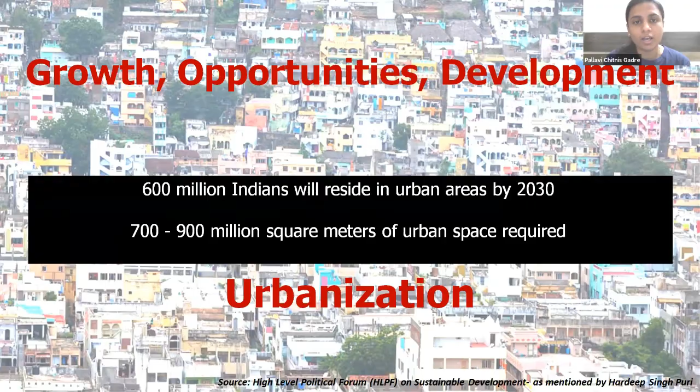It provides anyone a lot of growth, opportunity, development, and with all these comes urbanization. So people migrate from smaller areas to cities, which overall increases the population in the cities. A recent forum on sustainable development indicated that around 600 million Indians will reside in urban areas by 2030, which means 700 to 900 million square meters of urban space would be required to accommodate so many people in the city. So, with all this opportunity and urbanization, there would be a lot of challenges.

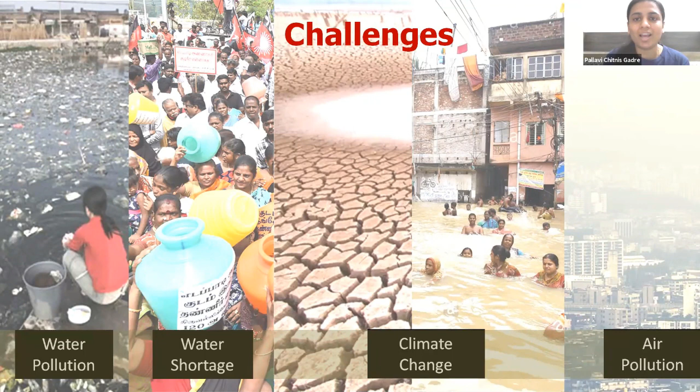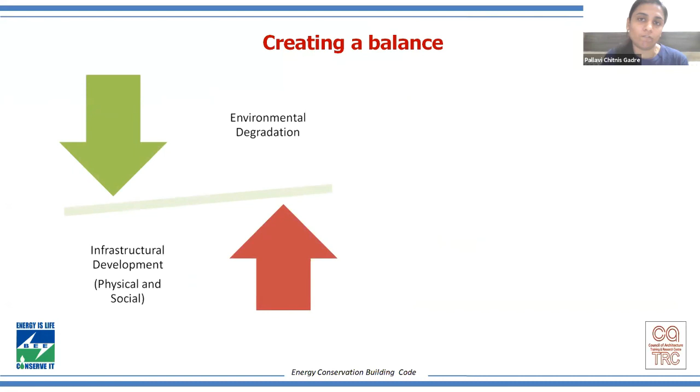And I suppose to an extent, we have started facing these environmental challenges, be it water pollution, climate change or air pollution. And this is something which we need to cater to. It is very, very important to create a balance between the two, because on one hand, the infrastructural development is going to increase, which is going to ultimately degrade the environment. So sustainable development can help in creating a balance between infrastructural development and environmental degradation.

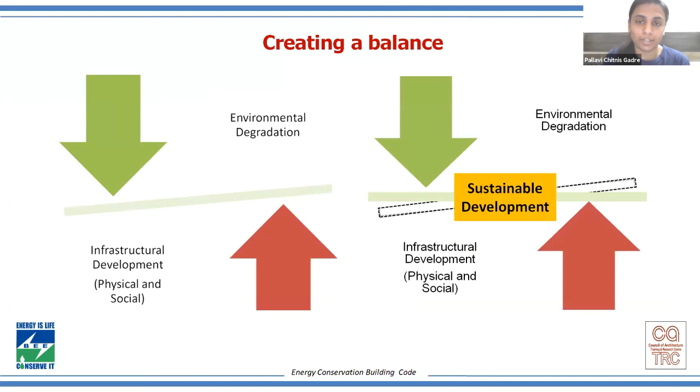A lot of national and international forums have already started working on it since the last 10 years. To name one, the Sustainable Development Goals are the latest goals defined by the United Nations, and they cover a lot of aspects of sustainable development. Energy efficiency or energy conservation is one of the important aspects indicated in the SDG goals.

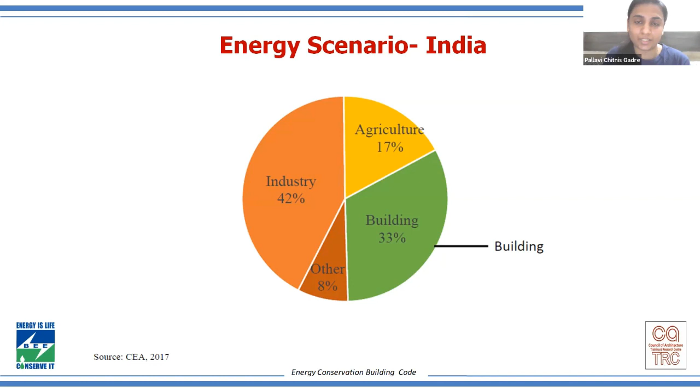Now, if we look at the energy scenario of our country, the building or construction sector comes at number two as far as energy consumers are concerned. Around 33% of the energy is consumed by the building and construction sector. This has been indicated by CEA India.

If we look at the construction scenario of our country, I think we are at a very, very beautiful place right now. Lot of development is going to happen. Lot of new buildings are going to get constructed, which will give us the opportunity of developing something sustainable, something which is energy efficient at the initial stage, and to inculcate these concepts at design stage. Existing buildings give us a lot of retrofitting opportunity, with potential of saving around 30 to 50% of energy or water per se.

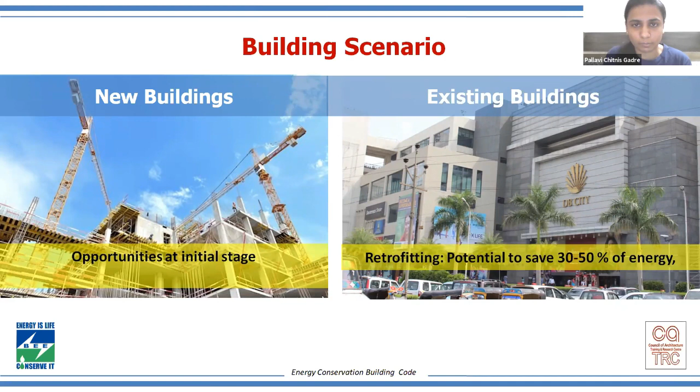If we study the building footprint of our country, currently around 659 million square meters of construction has already happened, and USAID indicated that by 2030, around 1900 million square meters of building footprint is going to get constructed, which highlights that around 66% of the building is yet to get constructed. So this gives us an immense opportunity to look at energy conservation in such a way that the right design of building can help us in reducing the overall energy consumption of the buildings.

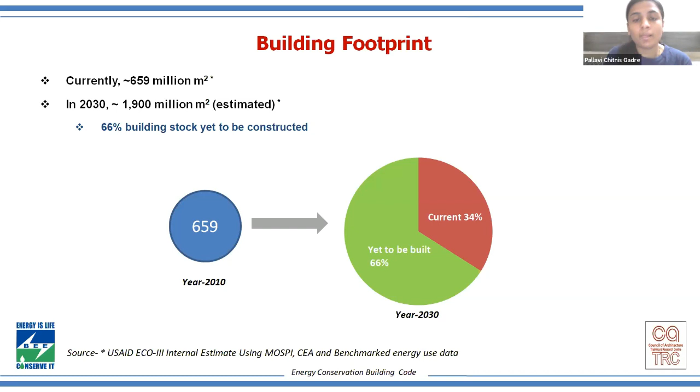So with this as a background, the Energy Conservation Act was initiated in 2001. And let me take you quickly to the Energy Conservation Act, which was enacted in 2001.

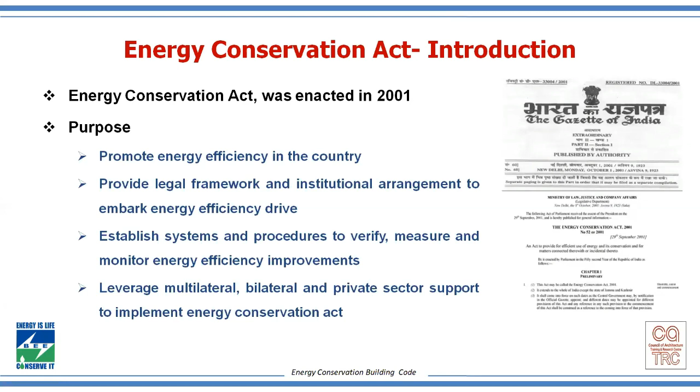This particular act was enacted in 2001, and the main purpose was to promote energy efficiency in the country. This act provided a legal framework and institutional arrangement to embark on the energy efficiency drive of the country, with lots of bifurcations indicated in the act. Let me take you quickly through the aspects that the Energy Conservation Act talked about.

The major aspects of this initiative were evolving minimum energy consumption and performance standards for notified equipment and appliances, prohibiting or identifying manufacture, sale and purchase of equipment that consumes a lot of energy, and introducing a mandatory labeling scheme for notified equipment and appliances to enable consumers to make right choices. Basically, creating awareness was also one aspect of the standard and labeling program.

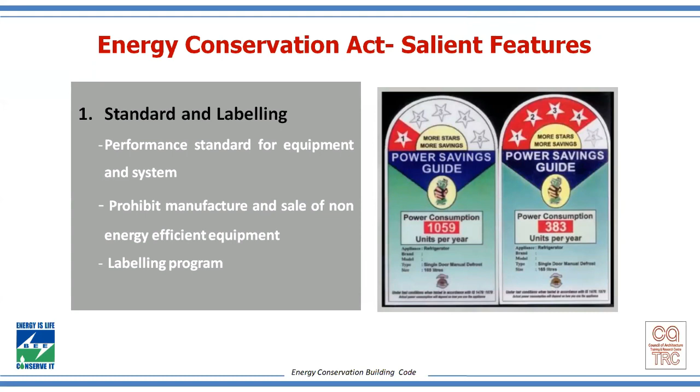Inculcating information on the benefits of energy conservation and energy efficiency to the consumer was an important part of the program. The second important aspect covered in the Energy Conservation Act was regarding certification of energy managers and accreditation of energy auditing firms.

This particular feature led BEE to establish an entire scheme of auditing and certifying energy guzzlers. For this, they introduced various exams, and identified BEE certified energy managers and auditors, who were experts in policy analysis, project management, financing, and implementation of energy efficiency projects through certification and accreditation programs.

I hope all of you are aware of designations where people mark themselves as BEE certified energy auditors or BEE certified energy managers. These are the experts identified by BEE, and this entire scheme was created because of the Energy Conservation Act.

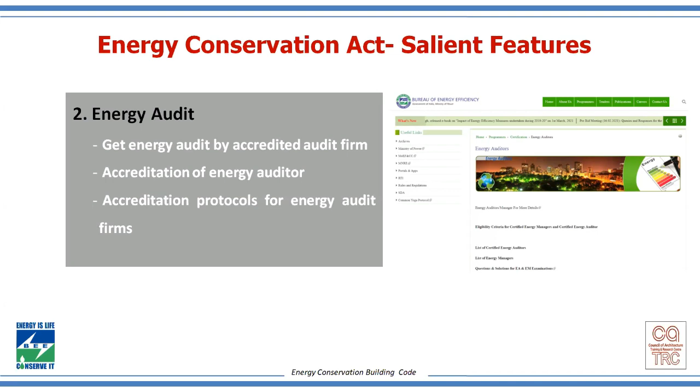The third important aspect highlighted in the Energy Conservation Act was defining the Energy Conservation Building Code and norms, which would help stakeholders from the building industry reduce energy consumption of the building. The code basically highlights various strategies and aspects that can overall help in reducing energy consumption at the design and construction phase of the building.

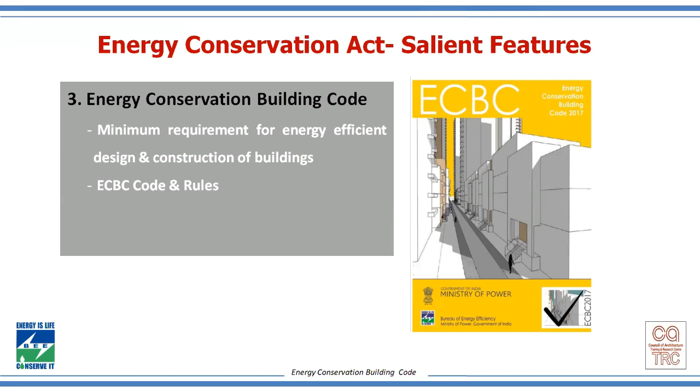There is also a provision for monitoring the building, because if you can't measure it right, you can't really monitor it. So a monitoring mechanism has also been indicated in the code. Over the next 5 days we are going to focus on this particular aspect of the Energy Conservation Act, so you're going to get a lot of information on it.

The fourth important criterion indicated by the Energy Conservation Act is establishing an Energy Conservation Fund. This fund is set up at a central level, to promote energy service companies, and to increase or support research and development related activities, which ultimately would help reduce the energy consumption pattern.

Last but not the least, capacity building. It is very important to make people aware of the strategies they can adopt. These three aspects are very important as part of the Energy Conservation Fund.

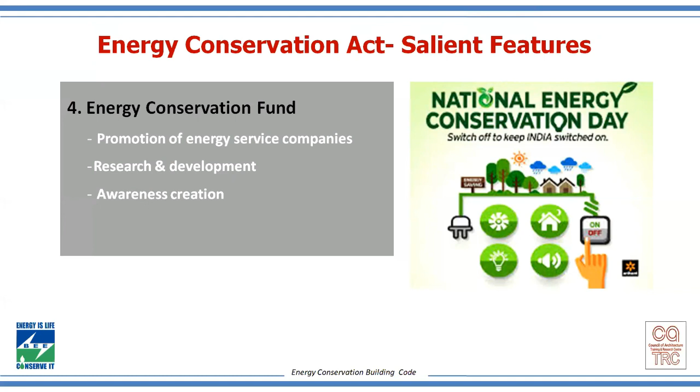Last but not the least, I think a lot of you might have heard about the Bachat Lamp Yojana. This particular scheme helps in replacing old incandescent lamps with CFL or LED, now LED lamps have been introduced. This yojana can be availed if anyone goes to the state designated agency, and they can get their lamps replaced there at a very nominal price.

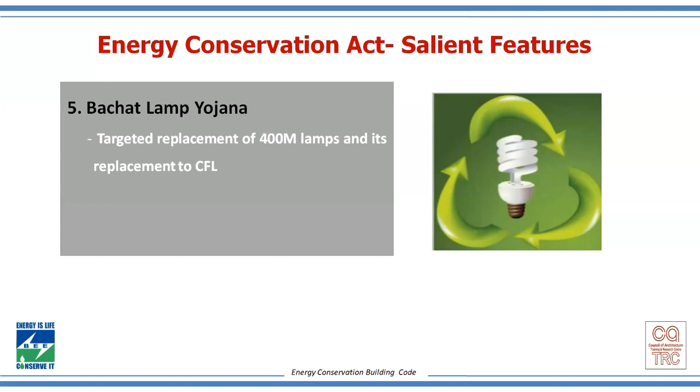So these are the major salient features that are part of the Energy Conservation Act. And coming back to the Energy Conservation Building Code, there are three very important pillars.

One, as I told you, the Energy Conservation Act, because the code is part of the act. Second is the Bureau of Energy Efficiency, because they are the ones who have developed the entire code, created the entire pool of policies, and direct the state designated agency on how to go about it.

Last but not least are the state designated agencies. Every state has one SDA who works on energy conservation related policies. In MP we have MP Urja Vikas Nigam, who works on renewable and energy conservation related activities. In Maharashtra, MEDA, the Maharashtra Energy Development Agency, is there. Similarly, Chhattisgarh has CREDA, and Punjab has PEDA. Each and every state has their own named designated agency.

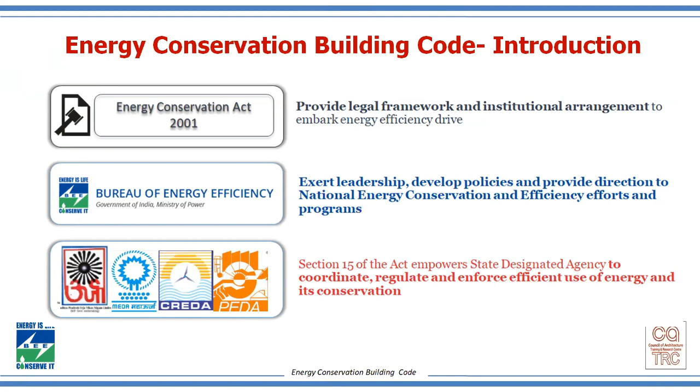Under Section 15 of the Act, the state designated agency is given power to coordinate, regulate, and enforce efficient use of energy and its conservation. The entire code is defined by the Bureau of Energy Efficiency, but each state has to adopt the nationalized ECBC code and indigenize it, and the entire enforcement mechanism would be under the state designated agency's purview.

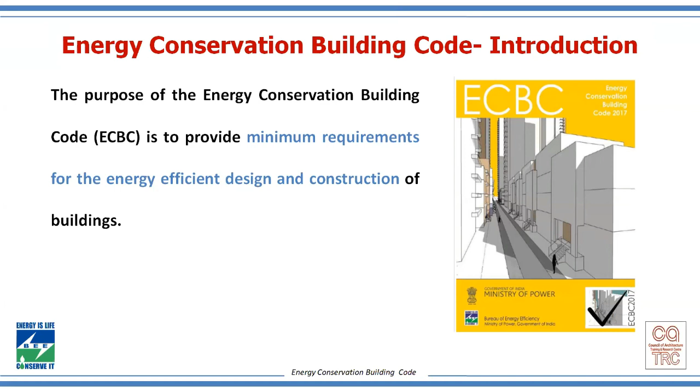As I told you earlier, the main purpose of energy conservation building code is to provide minimum requirements for energy efficient design and construction of buildings. I want to emphasize that the code never gives strategies or indicates that you need to follow a particular technology or buy equipment from a particular company. It's a completely manufacturer and technology neutral code. It just indicates what needs to be followed. How to achieve it is completely up to the designer's purview.

The eligibility of energy conservation building code is quite clear. The code clearly indicates that commercial buildings having connected load of 100 kilowatts or above, and the building which is going to get constructed, needs to follow the ECBC code.

Now, there might be a situation where an existing building is going for retrofitting, or there might be a situation where, say, it's an office building, G plus two floors, and then two more floors need to be added. Some expansion is going to happen. In such cases, the new portion, the new floors, or the new expansion will have to follow and adhere to ECBC norms. The old part of the building will not have to adhere to the norms.

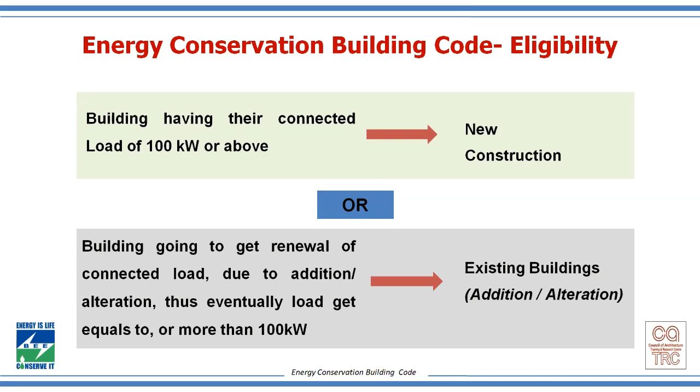In case the entire building is going to get retrofitted, that means 80% of the building, 80% of the systems are going to change, then in that case, the new systems that are going to come, even if it is an old building, will have to follow the ECBC norm. So I'll again repeat the fact that the code is eligible for commercial buildings having connected load of 100 kilowatts or above, and it needs to be a new construction or a major renovation or retrofitting.

The broad parameters, or the significance of energy conservation building code, are very clearly indicated. The building code will help in regulating thermal performance and energy use according to the climate zone. This is very important to understand. Climate zone is a very important aspect, and that is the whole reason of decentralizing the code based on specific regions. That's why the code has been given to the state designated agency to take it ahead, because it is very important to indigenize the code based on climatic zones.

The second important feature of the code is it encourages use of daylight, shading devices, natural ventilation, and solar energy. So basically it inculcates the idea of having passive design. This gives a beautiful opportunity for architects like us to involve passive design strategies right from the design stage, so that minimum reliance on technology can be done.

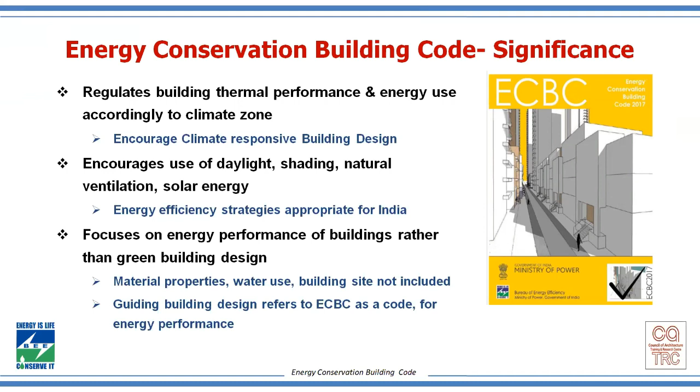This is what has been followed in the code as far as climate is concerned. As indicated by the National Building Code of our country, the entire country is divided into 5 different climate zones, and the entire code revolves around these 5 climatic zones.

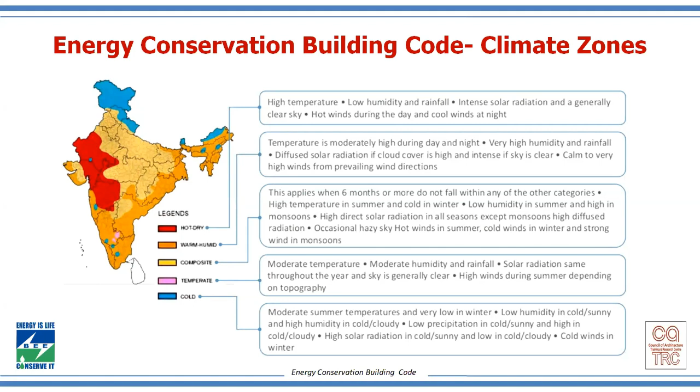I would request, by the end of the session, all of you to download the Energy Conservation Building Code. It's freely available on Google. If you just type ECBC 2017, you will be able to download the code, and then you will get into details of the climate zones of the country.

The code also clearly indicates the scope, because constructing a building involves lots of people and lots of systems. So it was very essential to define what all aspects are included and what all aspects are excluded from the code. Aspects or elements such as building envelope, mechanical systems such as HVAC, hot water heating, interior and exterior lighting, electrical powers, motors, and renewable energy systems are included under the scope of the ECBC code.

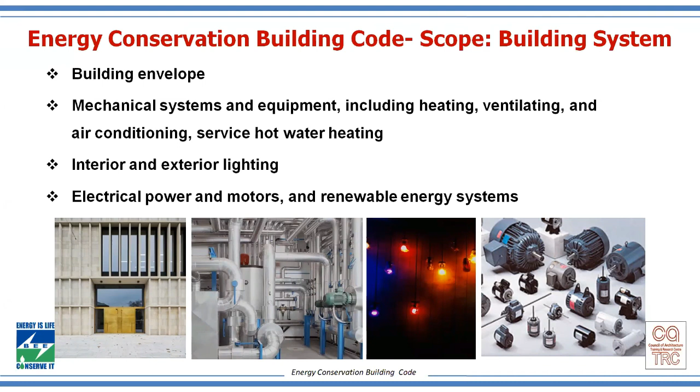So there are certain exemptions that have been clearly indicated. The ECBC code indicates that buildings that do not use electricity or fossil fuels are exempted from the code.

What do you mean by 'does not'? I think all of you must be aware of a concept called net zero buildings. A lot of people are exploring this concept. Right now these buildings are not that common, but in future there will be a time where buildings generate their own electricity - these are commonly known as net zero buildings. So if any building highlights that it generates its own electricity and doesn't need electricity from the government, then that building would be exempted under the code.

Any equipment and portion of building systems that use energy primarily for manufacturing processes are also excluded from the code. In case there is any conflict with safety, health, and environmental codes, then the safety, health, and environmental code shall prevail over ECBC code. So fire and safety norms definitely would be prevailing over ECBC code.

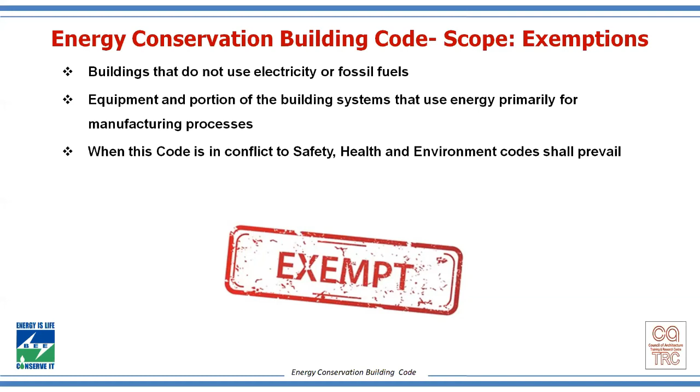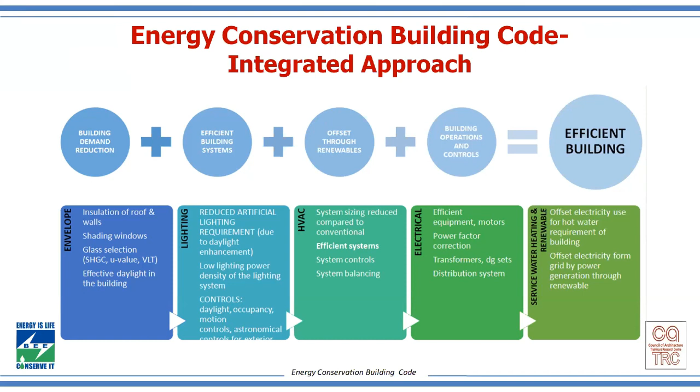Now, conceptually, if we try to understand how the code has been defined, it has been designed in a very holistic way, with an integrated approach. Four important aspects: building demand reduction, efficient building systems, offset through renewable generation, and building operation and control. These are the 4 pillars of ECBC code, and together they lead to an efficient building design. That's how the entire code has been defined.

To get into a little more detail, the code has been divided into 4 broad components or modules. The first module focuses on building envelope, which focuses on the selection of material of the building that is exposed to the environment. If you refer to the table of contents of ECBC code, this module is indicated in section 4 - building envelope.

Similarly, comfort systems and control belongs to section 5, and this section ensures the efficient designing and selection of air conditioning equipment, and also highlights aspects that help in designing naturally ventilated buildings and spaces.

The third section, section 6, covers the aspects of lighting and control. Both exterior and interior lighting systems have been integrated in this section, and it limits the demand of lighting load in integration with various sensors and control based on specific requirements of the building and its spaces.

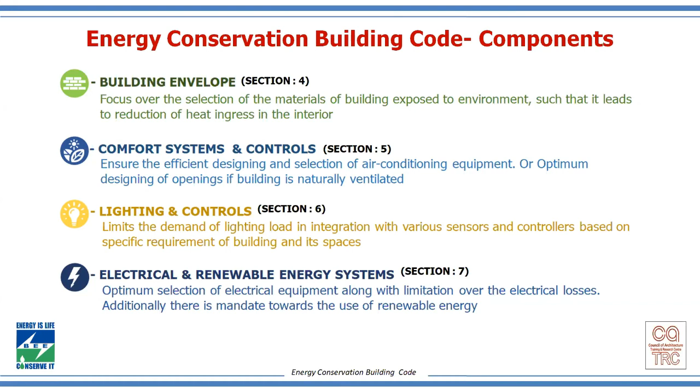Electrical and renewable energy system is the last section, section 7, and it focuses on optimum selection of electrical equipment along with limitation over electrical losses, and it also gives a mandate towards use of renewable energy.

So, to concise everything on one slide: all commercial buildings with connected load of 100 kilowatt or more, with new construction or major renovations or additions, will be within the scope of the Energy Conservation Building Code.

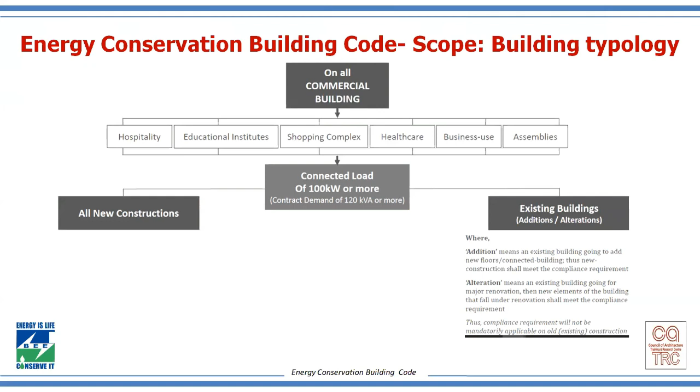When we say commercial buildings, the code adheres to the definition of commercial buildings as indicated by the National Building Code. So buildings such as hotels, resorts, institutional buildings, colleges, schools, hospitals, outpatient healthcare buildings, shopping malls, open galleries, museums, supermarkets, malls, large offices, IT and all types of offices, multiplexes, theaters, and even buildings used for transport services all come under the purview of the Energy Conservation Building Code.

Factories are exempted since right now BEE is not focusing on looking at manufacturing processes per se.

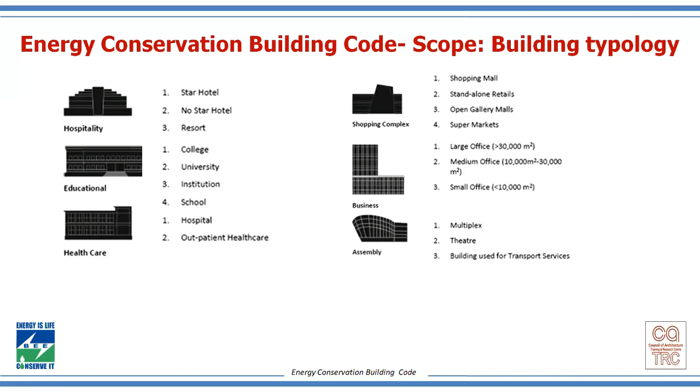So the code has very clearly indicated different performance levels. The code has 3 different tiers of building performance: ECBC, ECBC Plus, and Super ECBC. ECBC is the minimum level of performance, and it is mandatory for all projects to follow. If the ECBC level of performance is not achieved, the project cannot go ahead for construction.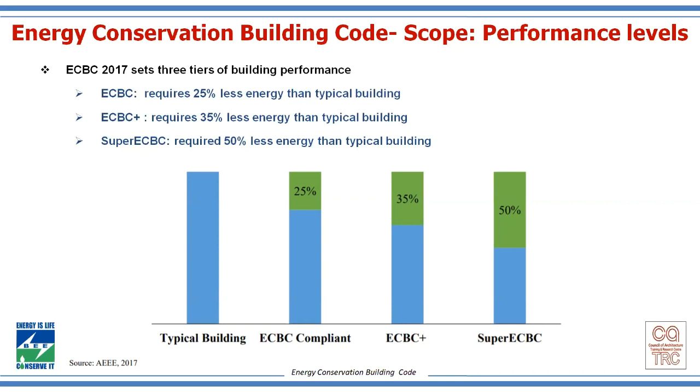ECBC Plus and Super ECBC have been included in the code to encourage people to go for even better building designs. During a series of stakeholder meetings that the Bureau of Energy Efficiency conducted, it was highlighted that while we focus on ECBC level of performance, there are certain people who are pro towards energy conservation and really want to cross the threshold. So there should be something to encourage people to go for better performing buildings, and that was the whole reason for introducing ECBC Plus and Super ECBC in the code. ECBC Plus requires 30-35% less energy than a typical building, and Super ECBC is about 50% more efficient than a typical building.

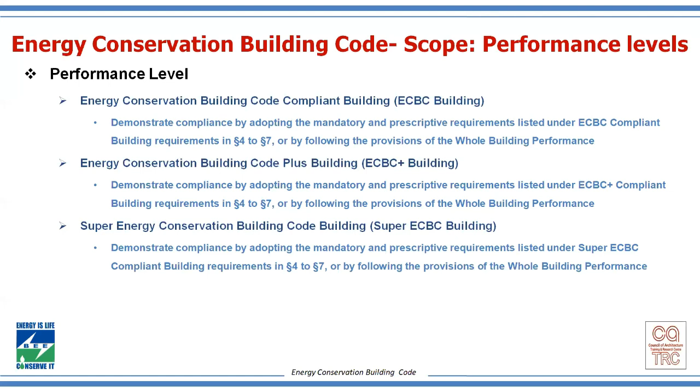So this is something I have already explained - ECBC, ECBC Plus and Super ECBC - for all performance levels you need to adhere to sections 4, 5, 6 and 7 of the code. And there are certain bifurcations already given in these 4 sections as far as ECBC, ECBC Plus and Super ECBC buildings are concerned.

Now let's look at the compliance approach of the code. So as I told you earlier, there are 4 different aspects included: envelope, HVAC, lighting, electrical power. There are a set of mandatory requirements, and then there are a set of prescriptive compliances. So mandatory requirements are ones which are compulsory to be followed. If one doesn't follow mandatory requirements, you are not going to get ECBC.

You're not going to get... Sorry. ECBC. Hello. Yeah, it's clear, ma'am. I think it's clear. I request all participants to please be on mute. I'm sorry for the inconvenience. You can continue. It's okay.

It's okay. So, mandatory requirements are ones which are compulsory to follow. If someone doesn't follow those requirements, ECBC compliance won't be given. If ECBC compliance is not given, you cannot commence your construction process. Similarly, there is a prescriptive set of requirements. So the prescriptive set of requirements is like a prescription.

It's similar to how we go to a doctor and he prescribes us medicine. He indicates which medicine needs to be followed, how many doses we need to take, what mg of medicine we need to take, and we just need to follow those, right? Similar to it, ECBC also prescribes certain requirements which the project just has to follow. It's a very, very simple approach that has been adopted.

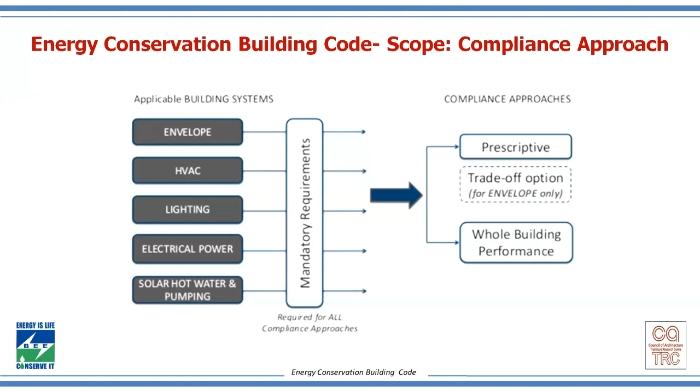So on day 4 we have one exclusive session on whole building performance, and I think we will go into that aspect in detail during the session. Right now I'll just quickly explain all three compliance approaches. So as I told you earlier, building system components should have specific performance values in the prescriptive approach, and very little energy expertise is required, because you just have to follow what has been indicated. So it's a little less flexible, but if someone has little energy expertise, they can go for this kind of approach.

Trade-off approach, as I told you earlier, we will be focusing on in the envelope module, but basically it's something like a barter system. So you can trade off between certain elements of the building envelope. Whole building performance, as told you earlier, is a very, very flexible approach, but it needs high expertise, high energy-related experience and expertise, and it needs software for modeling the entire system.

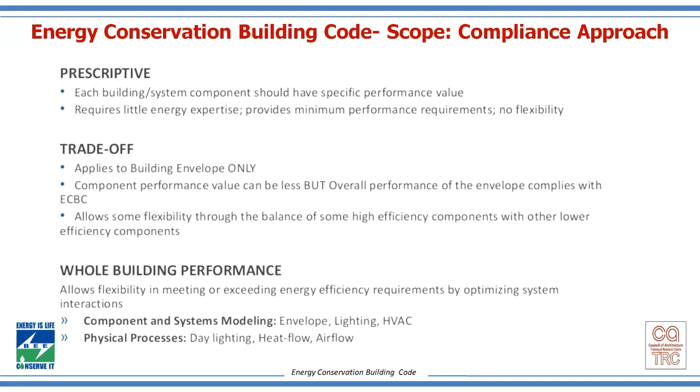So similar to our architectural building modeling, there are certain energy models available, there are certain energy softwares available which give you the opportunity to model the building and to see how the building is going to behave with respect to energy performance. And it's a very, very interesting system which we will be getting into in detail in our next few days. So I think this is something which I have already covered.

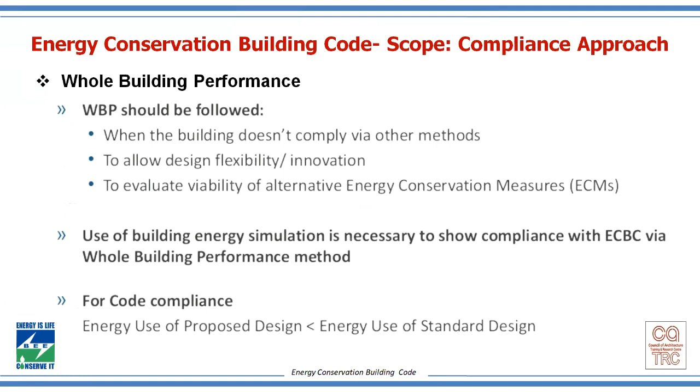So for the whole building simulation approach, or for other requirements also, you will come across two terminologies which are very, very important to understand: proposed building and standard building. The proposed building is the one which is consistent with the actual design of the building and complies with all the mandatory requirements of ECBC. The standard building is one which has the same building floor area, gross wall area, and gross roof area as the proposed building, and it complies with the mandatory requirements that are indicated here, and minimally complies with the prescriptive requirements of the indicated section.

So, proposed building and standard building are two different scenarios which we need to perform in the whole building simulation method, and we need to compare them. A standard building is a minimum ECBC compliant building, and the proposed building should always be better than the standard building. It should be one step, two steps, 10 steps ahead of the standard building. And for benchmarking purposes, for compliance purposes, the energy consumption needs to be predicted using energy simulation software for both the proposed building and standard building, and only then can compliance be weighed.

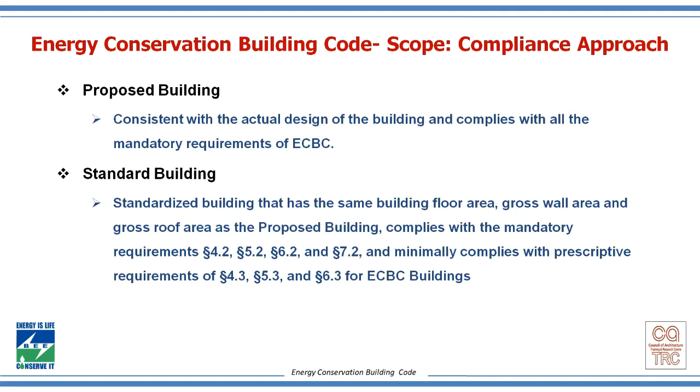So I know it's a little complicated, but in the next 5 days we are going to talk a lot on these two aspects. So don't worry, this is just your day one, so you will get clarity on these two aspects very soon.

EPI ratio. Now, for checking whether the project is compliant with ECBC code or not, you need to calculate EPI ratio. So EPI ratio is nothing but EPI of your proposed building. Proposed building is your actual design, divided by EPI of the standard building. Standard building is minimum compliant ECBC standard. Okay. So first step, we need to calculate the EPI for your proposed building, and then we need to calculate EPI for standard building. And then once you divide proposed EPI with standard EPI, you will get EPI ratio.

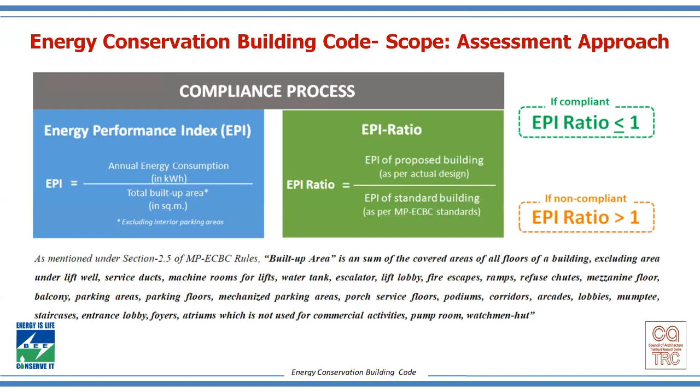So what would be the EPI? As I told you earlier in my previous slide, EPI is an annual energy consumption divided by built up area. You need to make sure that the built up area that is taken for the calculation is in square meters. Square feet doesn't work in this formula. So when we divide our total units kilowatt hour by built up area, we get energy performance index. Now, the unit of energy performance index is kilowatt hour per square meter per year.

So make sure that total 12 months electricity bill or 12 months energy consumption is taken into account, and the built up area that has been taken is in square meters. Now, if an owner is constructing a shopping mall, for ECBC compliance, whole building performance method is adopted. Okay, EPI of standard case is 150 and EPI of proposed case is 100. So what would be the EPI ratio? This is our second example.

So EPI ratio, as I told you earlier, is your EPI of proposed building divided by EPI of standard building. When we do division, which is 100 divided by 150, our EPI ratio comes out to be 0.66. This means EPI ratio is less than 1. This means the proposed case is more energy efficient than standard case. This means our building is compliant to ECBC standard. Now let's do a little bit switching of numbers.

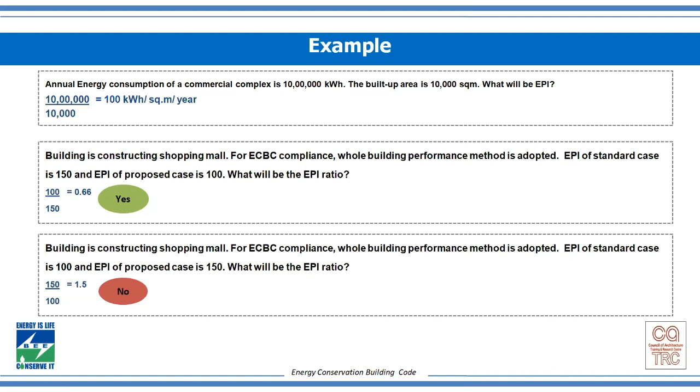And it clearly indicates the fact that the owner needs to have a discussion with his team, and needs to adopt certain measures which will help in reducing the energy consumption pattern of the building. So I hope these three examples have clarified your doubts. In case you have any further doubts, please feel free to indicate in the message box.

Now, when we talk about compliance approach, it is very important to understand how to go about it, because sometimes the project team might get a little lost in terms of how to start the entire process. So the entire system can broadly be divided into four aspects. The first aspect is your data collection. So it is important to understand the type of the building, to understand how the building is going to get operated, what is the climate classification, what would be the operational hours.

So this kind of exhaustive data collection needs to be taken. And I suppose architects do collect the data that I have mentioned here during the design process. Then the second stage is the analysis method. So analysis can be, as I told you earlier, a manual based method, wherein a prescriptive approach would be adopted, or it can be a computerized method where the whole building performance approach and simulation tools can be used.

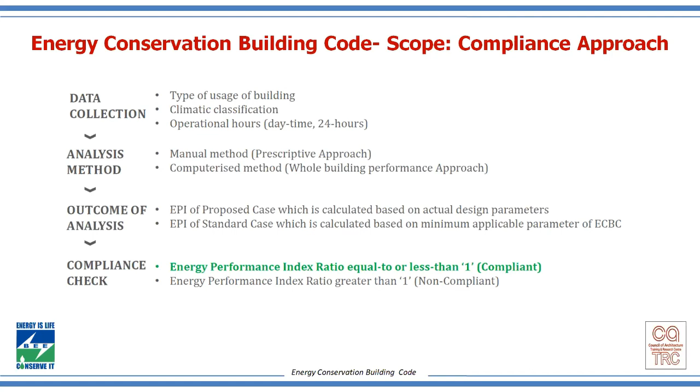The third phase is the outcome analysis. So outcome analysis is nothing but understanding the annual energy consumption patterns, EPIs for both the cases, and relating it, analyzing it with the ECBC requirements. The fourth step is the compliance check, which focuses on identifying or calculating the EPI ratio for the building, and to check whether the building is compliant or non-compliant to ECBC.

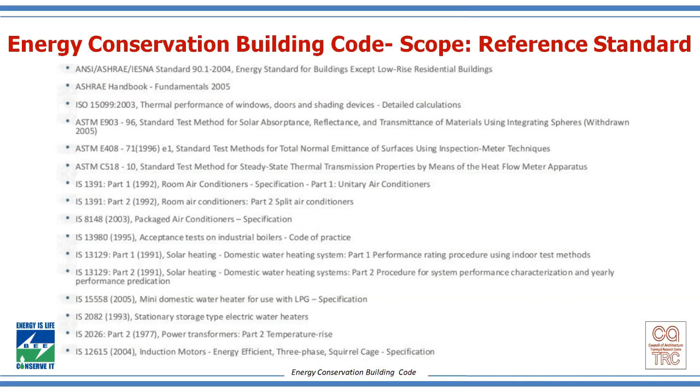These all are the set of reference standards which need to be referred by people who are working on the ECBC code. I think I have missed National Building Code here, so please make a note of it. So the last part of the first session is the enforcement mechanism. Little complicated, but very important to understand, because that is something which would be very practical for all of us to follow, and this is going to help you understand how the entire system is going to work.

So as far as the Energy Conservation Building Code is concerned, the entire roles and responsibilities lie with the central government, state government, and local government. And there are sets of roles and responsibilities at all three stages. So central government, Ministry of Power and Ministry of Urban Development, has to make sure that Bureau of Energy Efficiency is developing ECBC code related technical information, and the updation of the ECBC code is under the purview of central government.

State government's purview lies with the Urban Development Department or PWD Department and Department of Energy, which is your SDA, State Designated Agency. And the role of state government is to amend ECBC that is defined by Bureau of Energy Efficiency at central level to meet the state requirements. So in case there are any additions that need to be made, in case the code needs to get indigenized, then the responsibility lies with the state government, with the state designated agency.

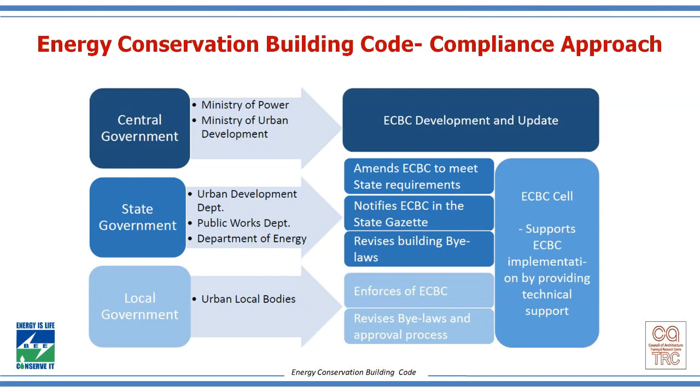Local government responsibility is very clear. Urban local bodies, be it Nagar Palika or Nagar Nigam, need to revise the building bylaws. They need to integrate the approval or compliance process of ECBC with their existing building approval process, and that's how the entire mechanism works. So these all are the key stakeholders in energy conservation building codes. In one or other way, these departments have played a very important role in adopting the ECBC code in their respective states.

So, let's quickly go through the notification process of the ECBC. Again, this would vary, but for understanding purpose, I have taken the MP ECBC notification process. I belong to the MP ECBC cell. I have worked in the cell for a few months, and that's the reason I have taken this particular example. This might vary a little bit based on different states.

So as far as the notification process is concerned, the first and foremost aspect that we did was a situation analysis. The existing scenario of the state was identified: identification of total commercial buildings in MP state, identification of energy consumption patterns from the DISCOM, the data was pulled in from the energy department, and how many commercial buildings are coming up every year was studied. This was a very important stage at the start. The second important aspect that we focused on was document preparation.

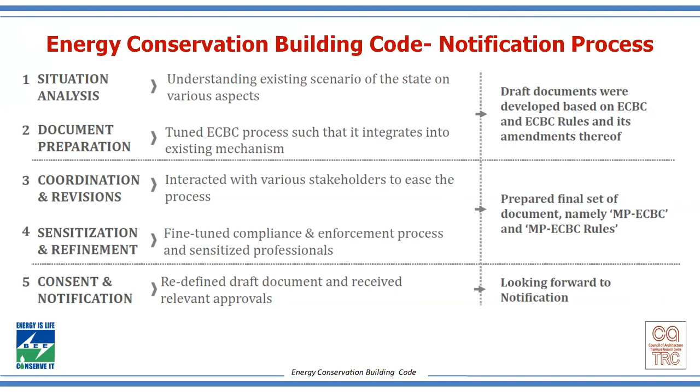So, talking about key stakeholders, it is very, very important to understand how the entire system is going to work. So, AHJ is authority.

Yeah, Pallavi ma'am, your voice is not audible. Is it audible? Yeah, now it's fine. Okay. I think we just lost it for a while. Okay. No issues. I'll start again.

So it is very important to understand who all are involved in the overall compliance process. So authority having jurisdiction, AHJ, is a very, very important stakeholder. AHJ is nothing but your Nagar Nigam or Nagar Palika. Owner and team comprises the entire design and engineering team along with the owner. Now there is a very, very important stakeholder which is the empaneled energy auditor. The empaneled energy auditor is the one who is going to audit the entire system. He is the expert who would be certified by the Bureau of Energy Efficiency.

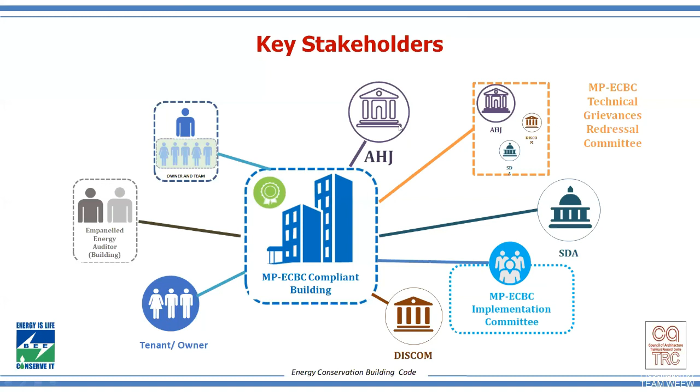with the owner again. The owner with the signed and sealed compliance form will be going to the authority having jurisdiction, which is your Nagar Nigam, and would be submitting the compliance form to Nagar Nigam. Once the compliance form is submitted there, a UBID number is issued. Nowadays in the conventional process also, if you want to construct a building, first you need to go to the AHJ and get it registered, and you get a unique identification number. So the same thing would be integrated now with ECBC compliance forms as well.

So the owner would be submitting the duly signed compliance form to Nagar Nigam, and once Nagar Nigam issues the UBID number, the project can go ahead with the construction. Now, during the construction phase, a lot of site visits, inspection and verification would be happening. It would happen in consultation with an empaneled energy auditor, and during various visits, the empaneled energy auditor will make sure that the specifications that are indicated in the compliance forms are followed in the right way, and it would be the duty of the building owner to make sure that changes or tweaking of the specifications has not been done.

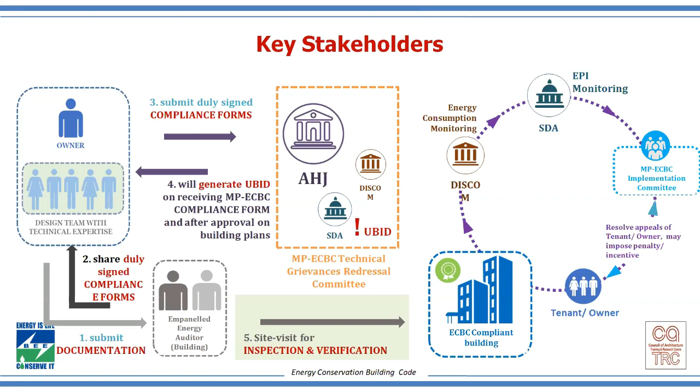And as far as MP is concerned, we are also focusing on having a penalty in place. It completely depends on the state designated agency. Few states are keeping certain sets of penalty. MP ECBC also is trying to find out a way of penalizing it, because until and unless penalty has been indicated, people won't take it seriously. And similar to it, for the people who are doing it seriously, who are doing it genuinely, there would be an incentive mechanism also in place, so that people get encouraged to adopt these kinds of measures. So I hope the overall process is clear. I know it's a little complicated, but in case you have any doubts, please do let me know.

Now I'll be getting a little more in detail on the process. So as I told you, the process has been divided into three stages: designing, construction, and post construction. So at designing phase, it is the responsibility of the owner and team to check for the compliance, to check for the mandatory requirements, and it is the responsibility of the empaneled energy auditor to assist the overall compliance process, to check the documentation process, and to share the duly signed compliance forms. And as far as the AHJ, Nagar Nigam, is concerned, it's their responsibility to generate a unique building identification number based on the signed compliance form shared by the owner, and to share the UBID number with SDA and DISCOM, so that all of the departments are on the same platform.

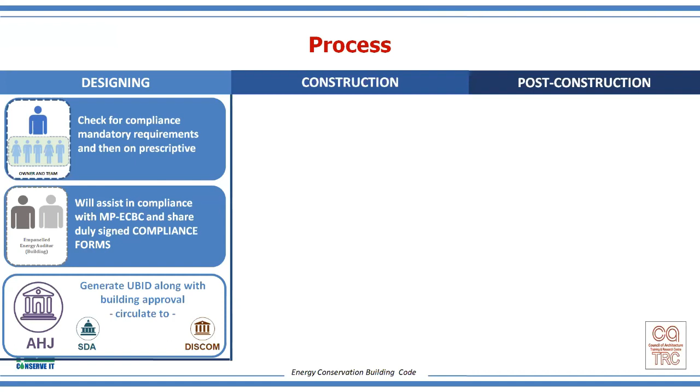During construction phase, it is the responsibility of the owner and team to ensure that the construction is as per the submittals. It's the responsibility of the empaneled energy auditor to visit and verify whether the documentation, the compliance forms that were submitted at design stage, is followed in the right way or not. And if everything is going smooth, it's the responsibility of the auditor to share the duly signed forms. It is also the responsibility of the auditor to notify in case there are any changes in the compliance forms between design and construction phase. And it is the responsibility of MP's ECBC cell, the technical grievances redressal committee, to address the ongoing issues raised by the state committee or raised by any owner.

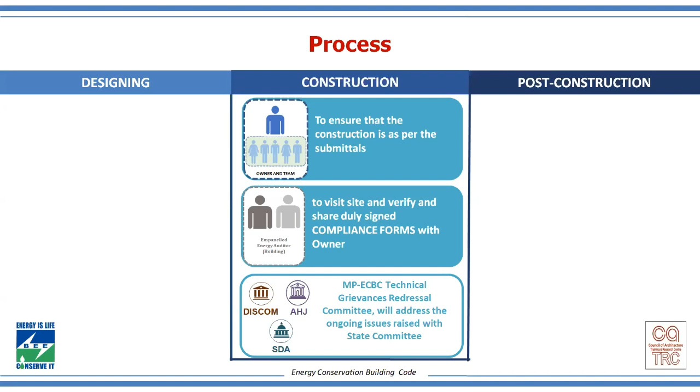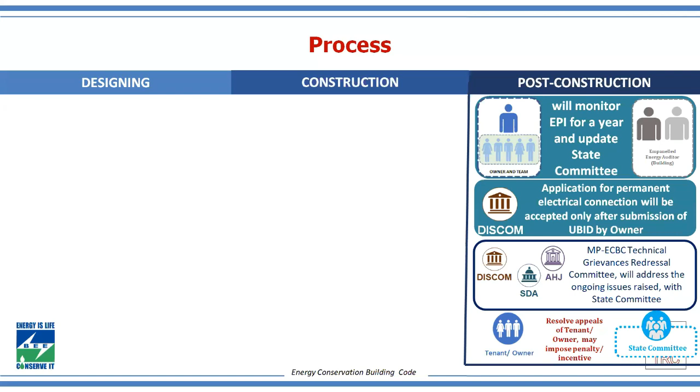Post construction phase involves almost all the stakeholders. So the owner and team's responsibility is to make sure that they follow the EPI that they committed in the design phase. They make sure that EPI is less than 1. It's the responsibility of the empaneled energy auditor also to keep a check on the EPI for 1 year. And DISCOM's responsibility is to give a permanent electrical connection in case everything goes smooth. And as I told you earlier, it is the responsibility of the technical grievances committee to make sure that all the ongoing issues that are raised by various stakeholders are properly addressed and resolved. So I hope you are clear with these three processes.

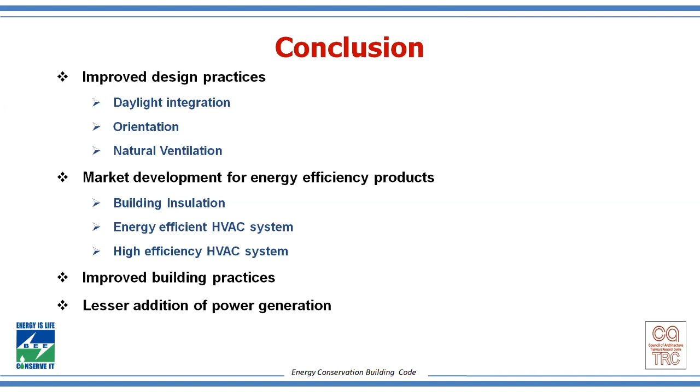And at the end, I would like to conclude by saying that ECBC is an opportunity. Don't get worried about how you're going to follow the process. It's a great opportunity for all of you to adopt energy conservation related strategies. It will definitely add up to a lot of benefit. It's a win-win situation. There is no need of panicking. It's a win-win situation for the owner as well as for the state government or central government, because the owner would be getting benefited since the overall energy bills are going to get reduced. At the same time, the state also is going to get benefited because the overall energy requirement of the state or of the country is going to get reduced. So please don't look at it as a challenge. Look at it as an opportunity, a beautiful opportunity, in which all of us can contribute, so that our country goes ahead towards sustainable development.